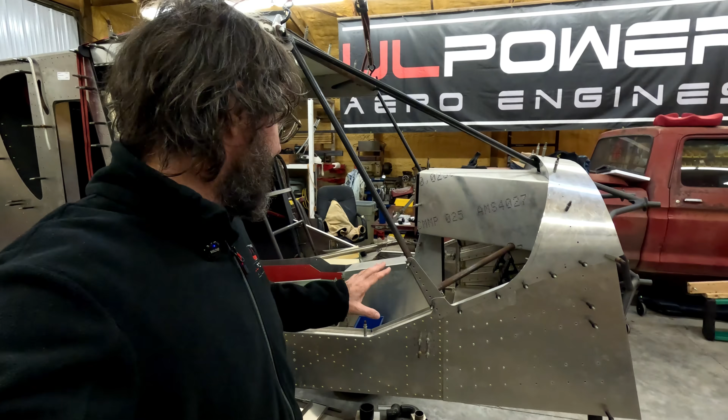All right, we'll start with a little update on the Super Duty. Honestly, guys, there really hasn't been anything physical happen with this since the last time you've seen it. I've done some measuring and stuff, and I've got some parts ordered from Beringer for master cylinders and some of the brake and wheel stuff. So that's in gear, and hopefully I'll have some of that stuff coming soon.

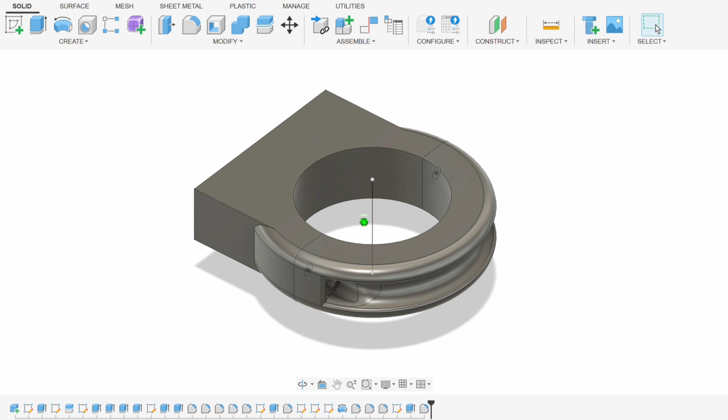And then there's this nose strut upgrade that's been in the works for years at this point. It really is a relatively simple front strut shock design, and they already have all the basic blueprints, drawings, and specifications required to fix it. So I'm not real sure what the holdup is. I've just got tired of being the squeaky wheel, guys. It's been 4 months since I was last told that I would be contacted for the next steps. Well, you guys have any suggestions on maybe who to contact to be able to get a custom front strut built for this thing? Because I'm ready for it to be on its feet. This thing needs to be making progress, and I'm kind of stuck on it right there.

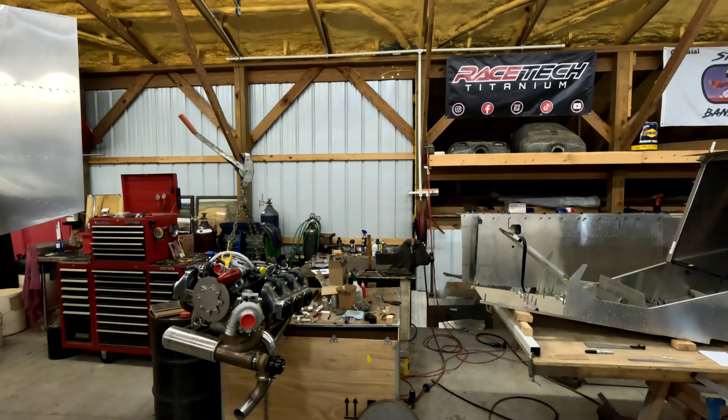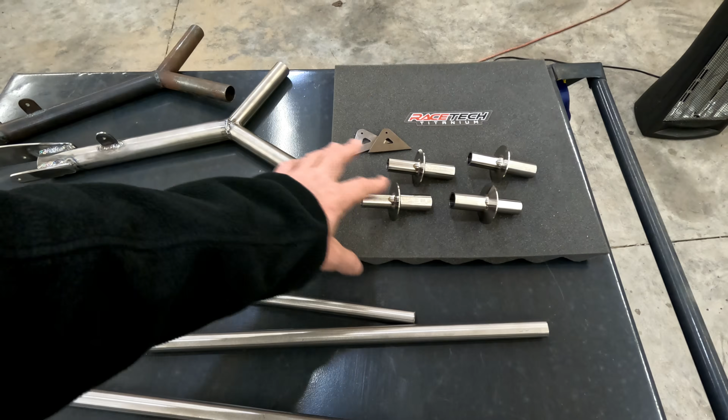But anyway, the disappointment for this is met way beyond with excitement with RaceTech. This RaceTech company, I've been dealing with them for a little while now. They're doing some amazing stuff there. I can't brag on them enough. I reached out to get some custom pieces made. They have CNC cut these pieces, the brackets and stuff that I'll need to weld on.

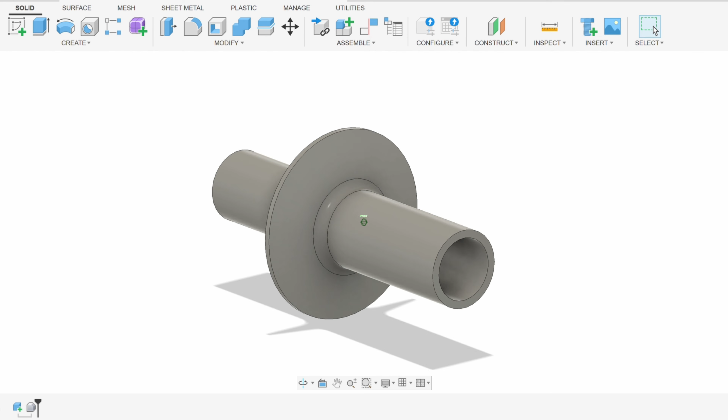They have also custom machined these titanium engine pins that I'm going to use for my single seater, which has brought on a whole new level of excitement because these little pins, you guys know I'm on a whole weight reduction thing, so the single seater is losing weight all the way around, but this titanium is really helping that. It takes 4 pins to mount the engine on a Zenith with the UL power, and essentially 4 of these pins, the combined weight will be a little over half a pound weight savings just in the pins. It seems like everything I do is either half a pound or a pound of weight savings.

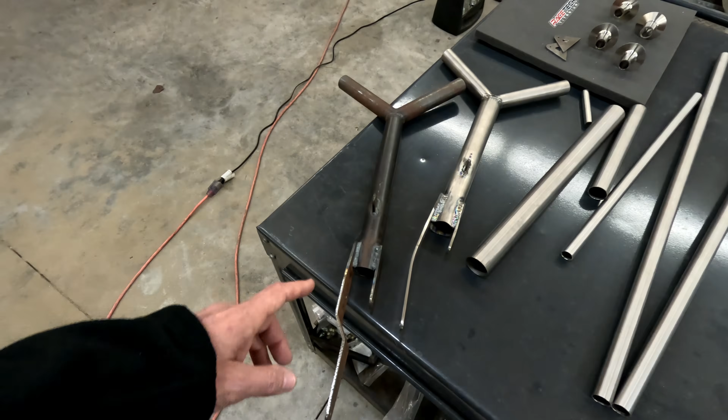Back earlier I built the titanium control handle for the Super Duty. It is roughly half a pound less than the chromoly, same thing. So I have other parts here to build the other control stick for the single seater. There's some cabin frame parts here and that kind of stuff. So the excitement is getting real on it for sure. Let's take a look at it.

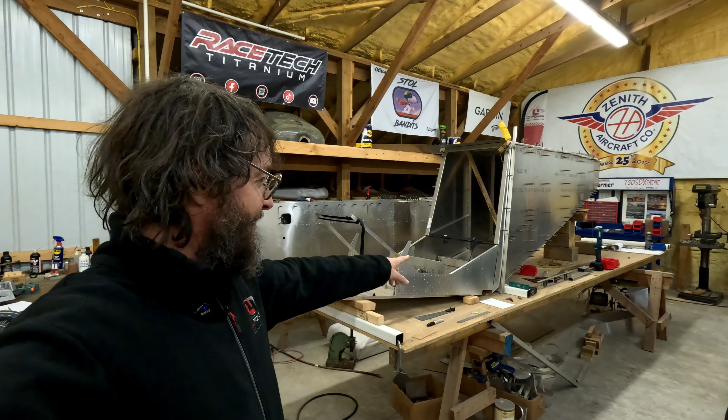So if you want to know what I've been up to since the last time, you can see it right here. This table, I've cleaned off the table yet again. I've had wing stuff on it. I've got both the Super Duty wings over here behind me. I had the 701 wing structure, all the pieces for it laid out on the table, studying and looking, and I'm trying to figure slats and profiles and all kinds of stuff out, and still working on it, but I wanted to move along with something that I had really already going, and I need to get this a little further for the titanium. So now the single seater is back on the table.

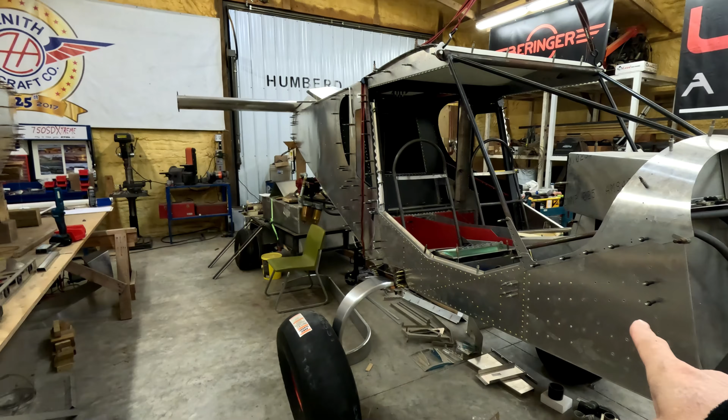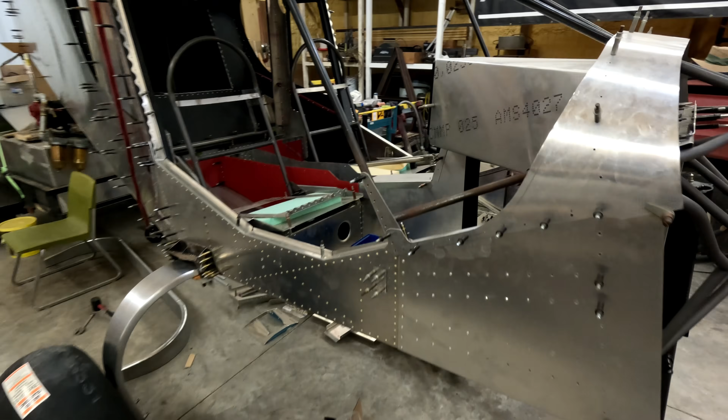All right, so like I said, you guys know that the 750 Super Duty has been on a bit of a diet with the titanium stuff I've gone with it, the brake pedals, control system, all that. But it's not even remotely comparable to the diet I've put the single seater on. I mean, look how skinny this thing's getting. It's going to be a fun little beast, and of course that has its own complications and problems too.

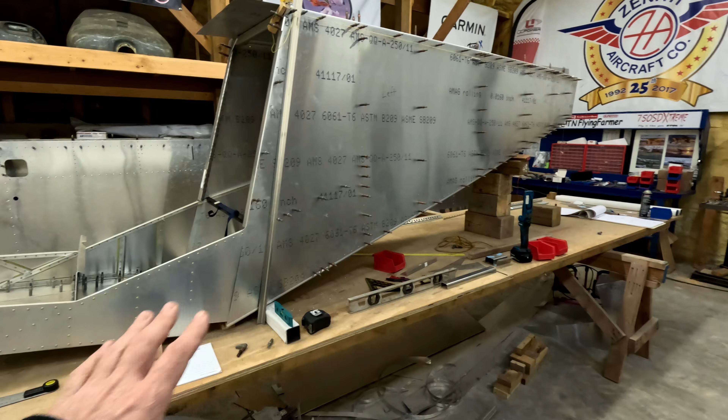But anyway, I've been sitting here for actually a couple of years looking at the rear fuselage mostly assembled, and I had the forward fuselage mostly assembled, but I did not have them joined yet. So at this point, I finally took the time to go ahead and get these things finished, mocked up. I got some more of the bracing and the structure put in the front of the rear fuselage, and they are now joined. It's clecoed together, so that is essentially one unit at this point.

I still have a fair amount of stuff to go, and guys, I'm envious of the guys who have the new kits that are final size match drill, because they can just cleco this stuff together and go ahead and put rivets in it.

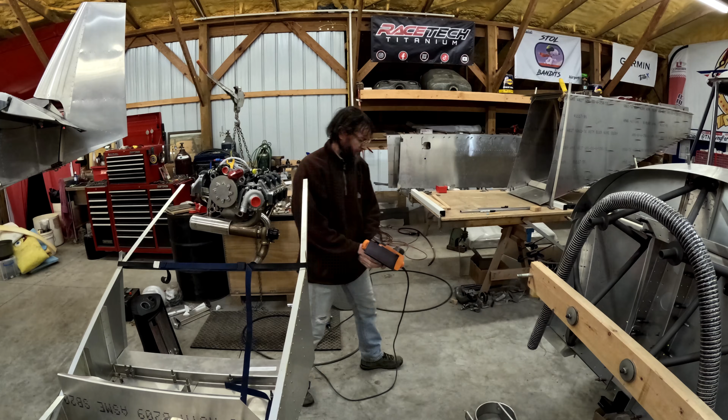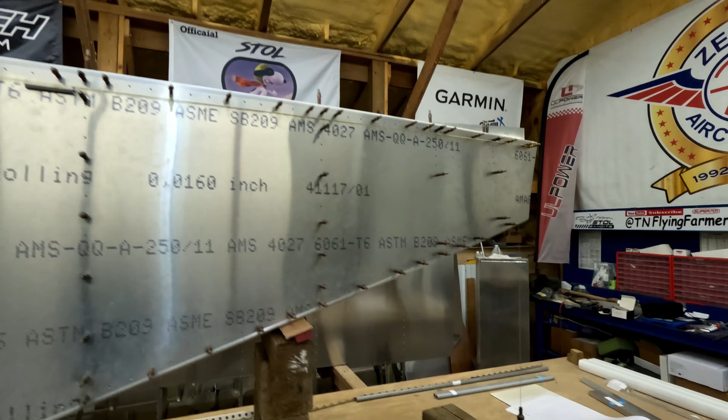These older kits, and especially this one, were not this way at all. I have had this forward fuselage in and out of the rear fuselage, I bet 100 times by now. I'd take it out, trim a little, measure and remeasure, put it back in, and remeasure some more. You can see I've got strings up there with a string level, a plumb bob back here where I've been measuring over to the edge of the table, getting everything perfectly lined up. I've used laser levels, just about every tool I could come up with - levels, strings, squares, angle finders, and all my rulers. So it's been quite a crazy fiasco of several days worth of getting this thing mocked up and trimmed to fit perfectly.

And it's really close to fitting what I would call perfectly. It was definitely time to make some progress on it. But the main reason I was really going back to this is the whole titanium thing's got me in a pretty good little drive here.

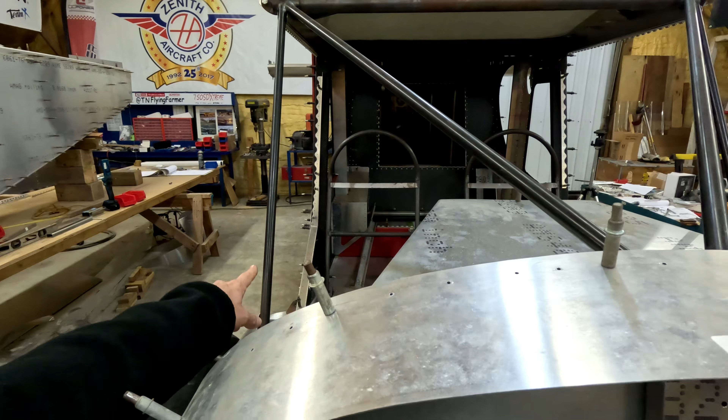So a couple of years ago, I had Zenith build a chromoly forward cabin frame, the first piece of it. This cabin frame fits right in here - it's the piece that goes across and in front of your shoulders in the plane. Let me put this down and show you. You can see it here, it's got the wing attachments for the front. The narrow one would be the same thing as what's right here on the Super Duty that goes up, across, and back down. So it's 3 pieces of tube with the 2 wing attachments welded into it.

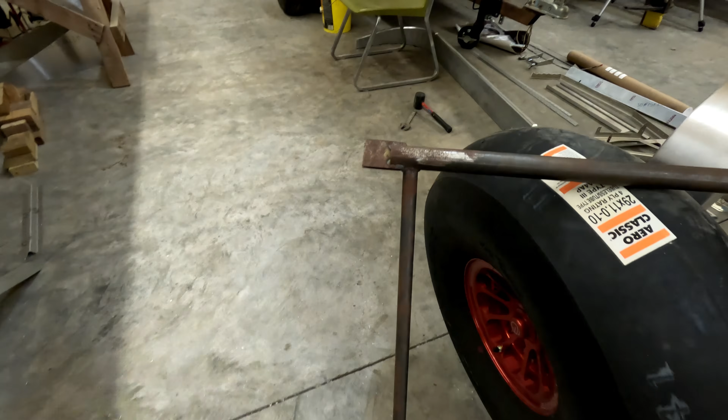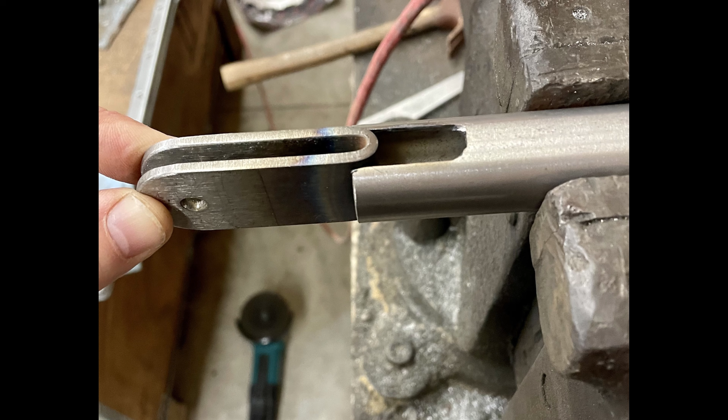That's essentially what I had Zenith build for me, because they have the jigs and everything to get all the angles right. And of course, the wing attach, you can see it's a different angle here than what it is for this tube that comes down. Well, fast forward a little, and I've been on the welding table getting stuff ready - jigged up, pieces cut and fabricated to work and fit.

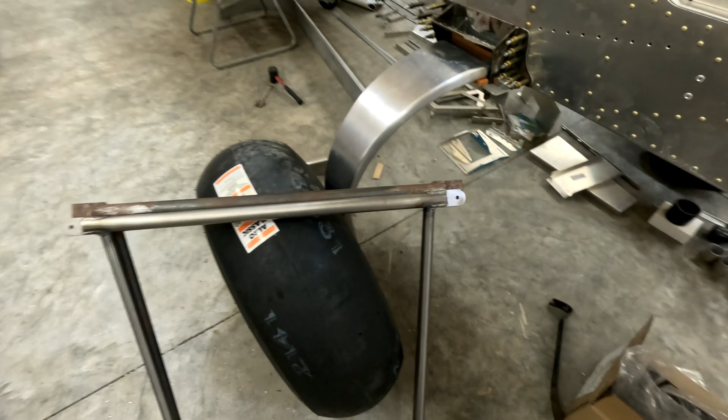But now I have this same structure in a titanium piece. The tubing is just a little bit thicker, the tabs are actually a little bit thicker also - I wanted the extra strength there for sure. That piece of the frame is roughly a pound less than the chromoly of the same thing. So exciting for sure. But anyway, that's why this piece is coming back along again.

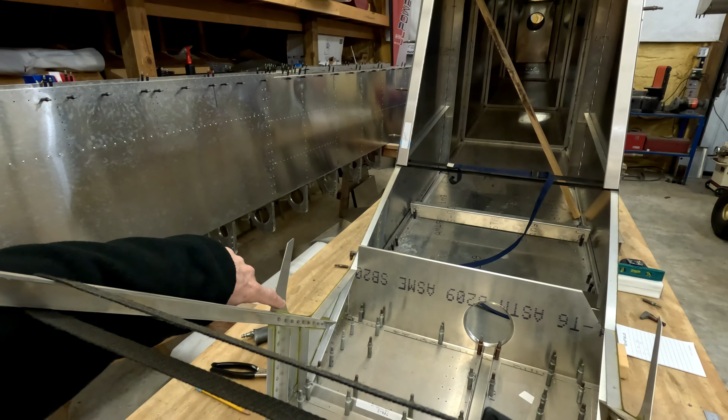Like I said, the cabin frame essentially comes from just in front of the door up that side, goes up above your shoulders, across, and the wing attachments are at the top, then comes back down on this side of the fuselage. That'll tie all that together.

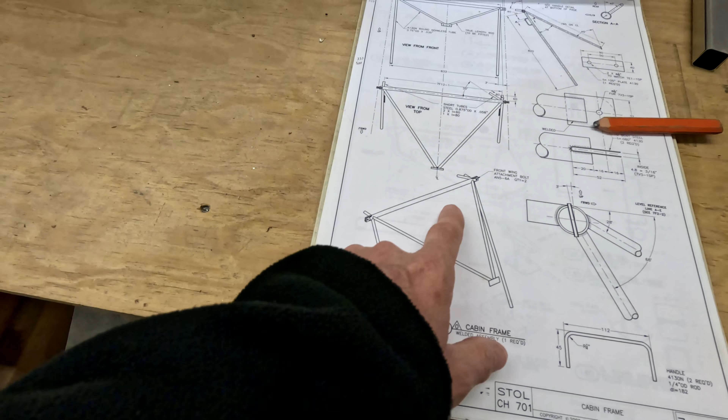So if we come up here and look at the plans real quick, here's a drawing of the cabin frame. The piece I have is just this tube across and then this tube down. So I don't have that front piece that ties into the firewall yet. I do have the tabs mounted onto it, and the standard 701 has some stubs welded in that extend back to the rear fuselage with aluminum tubes.

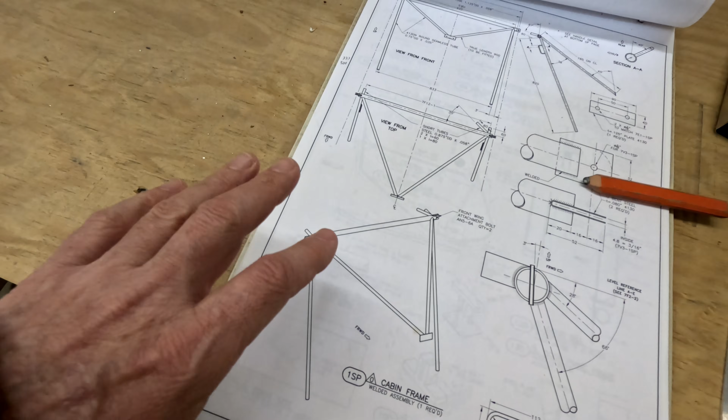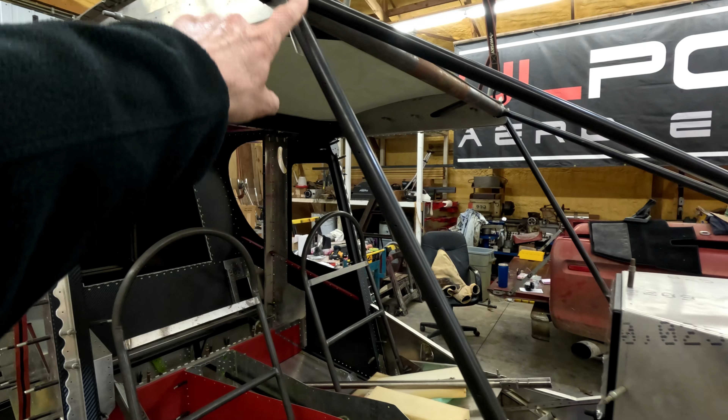This is unique to the 701. The 750 series - the tubes are welded in, so it's chromoly from this front tube all the way back to the rear fuselage. That tube inside there, instead of being an aluminum tube, is actually a chromoly tube welded all the way in. I'm going to do the same thing with this 701. I'm going to change it just a little bit and sort of copy the 750 design.

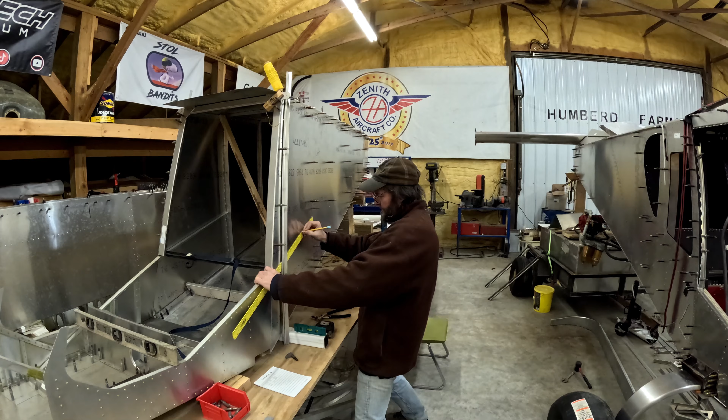So the entire cabin frame - the 2 tubes that come up to that front spar carry through, and then the 2 tubes that come down to the firewall, and also the 2 tubes that go back to the rear fuselage - will all be one single unit of titanium. So long story short, I had to get all of this fuselage put completely together, join the rear and forward fuselage to be able to get everything ready to mock up and jig up the rest of this cabin frame, so I can start fabricating tubes, cutting tubes, coping tubes, and doing all that with the titanium to get it ready to actually weld in together.

This titanium is still fairly new to me, but I am enjoying the work with it. It's a lot of fun to fabricate and figure these things out.

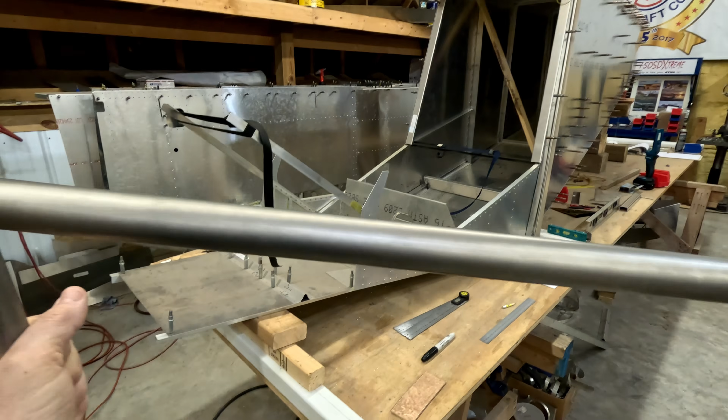Once I get a little bit further along and get this cabin frame mounted to the single seat 701, I'll be able to move further and start building the engine mount for it, all at the firewall area, since I have the engine mount pins in titanium, which is going to be a beast for sure. It's going to be very unique. Once I get that done, I'll move into the actual control area.

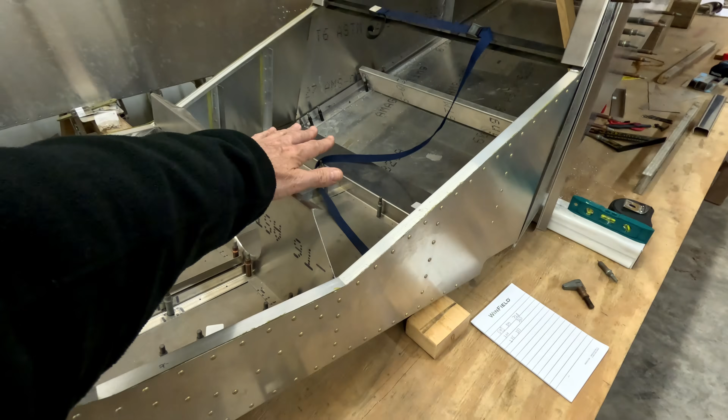It's going to have a completely different set of controls compared to a standard 701 because I'm offsetting the control stick from the center over to the right side to compensate for my seat, since I want it to be the same setup. I want to sit in the seat like a standard 701 and work the controls with my right hand, so that control tunnel and all the controls will go down the right side of the aircraft. I'm looking at some 750 design to carry that over to both sides and back to the rudder as well.

While it may not look like a huge amount of progress, I assure you it took a lot of time just to get this thing to where it is now versus being two pieces I've moved around separately for quite some time. Exciting for sure, it's coming out really well.

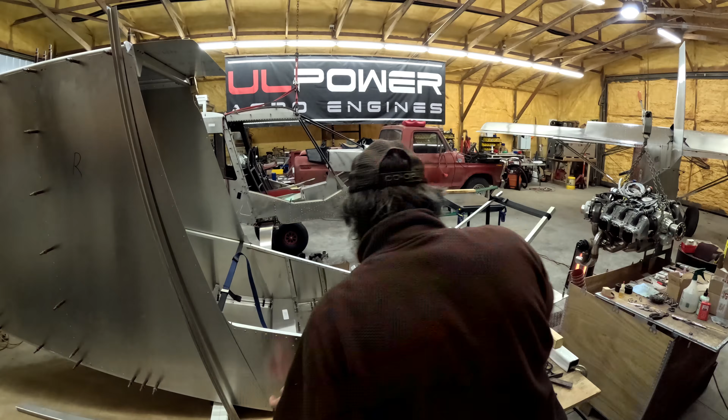There are a lot of tweaks I have to make, adjustment-wise, to make sure this thing is just right. It's getting really close, but I'm taking my time with the whole back and forth of take it apart, measure, put it back together, measure, take it apart again, for hours and hours.

I do envy you guys that can put these things together with the final size match drilled CNC kits, because you just put clecos in them, rivet them, and go, getting the whole fuselage done in less time than I spent just joining the forward and rear fuselage together on this one.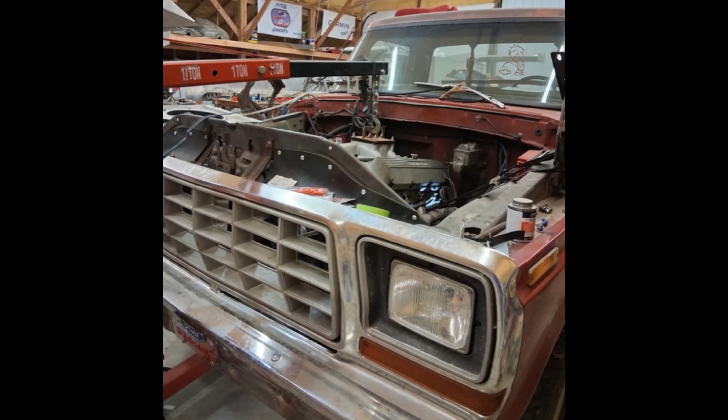Of course, there's still all kinds of stuff going on with the farm and cattle, but I've managed to get the engine back down inside this old truck, so that's going to take a little time here in the next couple of weeks as well.

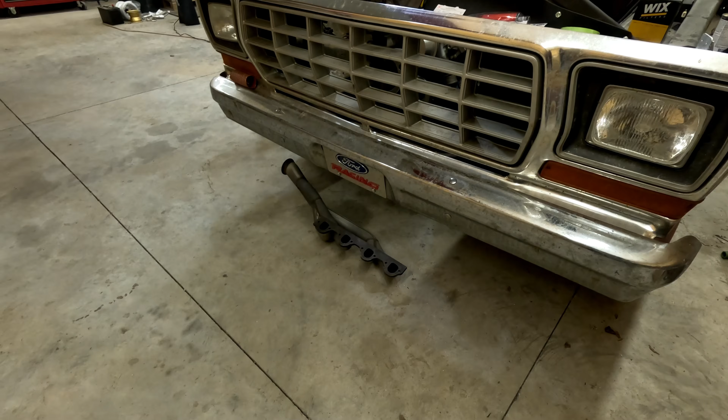I need to get the rest of it finished up - the wiring, the injection system, radiator and all that has to go back in to get it going. You can see there's a header I custom built, and all the exhaust has to be put back in too. I'm excited to get it going again - that's in the works as well.

I'm still making a few modifications here and there to get it tweaked just the way I want, but the 701s are such a fun bird to fly. I believe this year is the 40th anniversary of the 701, so I'm going to put out more content of the flying stuff. A 701 is, hands down, the most fun you can have in a really light aircraft.

At this point, I've landed this one all over the farm - in crop fields, pastures, and across the road at the school. I've been all over the place with this thing, flying down to the bluff, flying with a couple of the guys. This thing's a lot of fun. Of course, I've got my camera mount on it, so you'll see some more 360 footage with it.

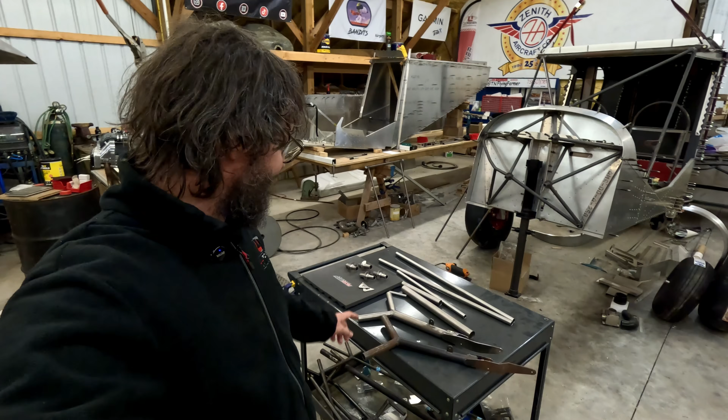Well, I better put the camera back down so I can get to work on some more of this titanium work. RaceTech's got me set up getting some very custom made pieces and brackets, so I've got to get a little further along to get some of this stuff mocked up and put together for you guys, and hopefully we'll see more of this come together soon.